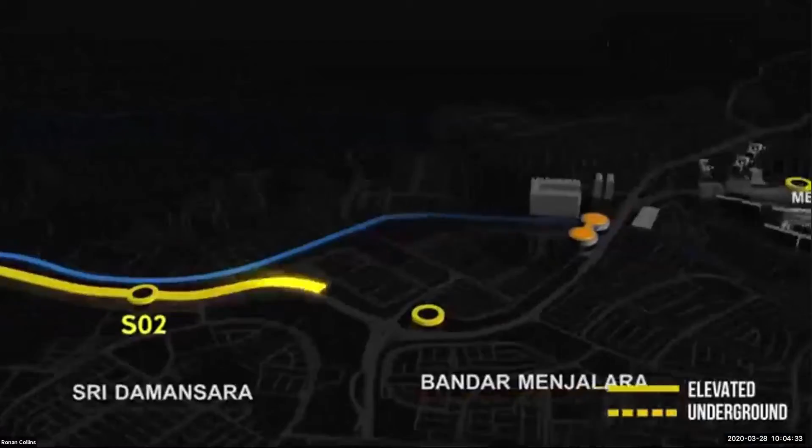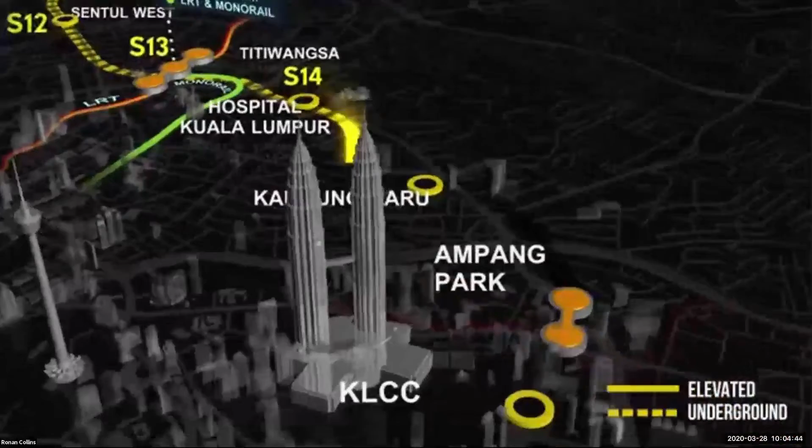So this is the actual alignment in a graphical form. So the section away from the city is all on elevated viaducts. So it's up on bridge sections. And when it comes into the city, there are twin bored tunnels coming through the city and they're coming to connect into existing LRTs and existing underground networks. So this train alignment is designed to connect to as many other train networks as possible to create a connectivity system.

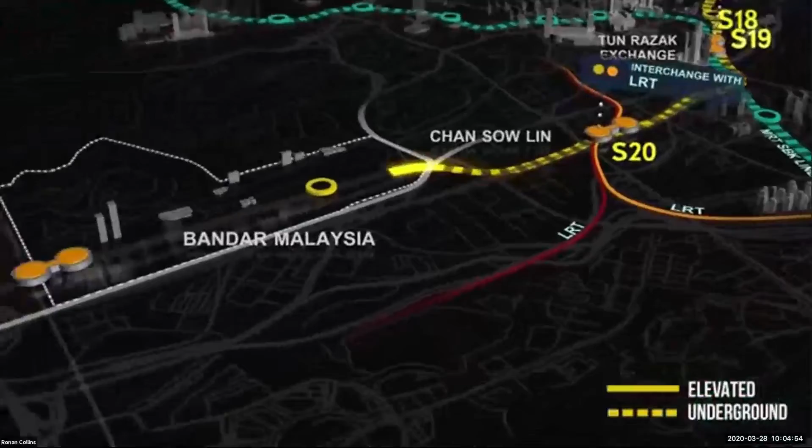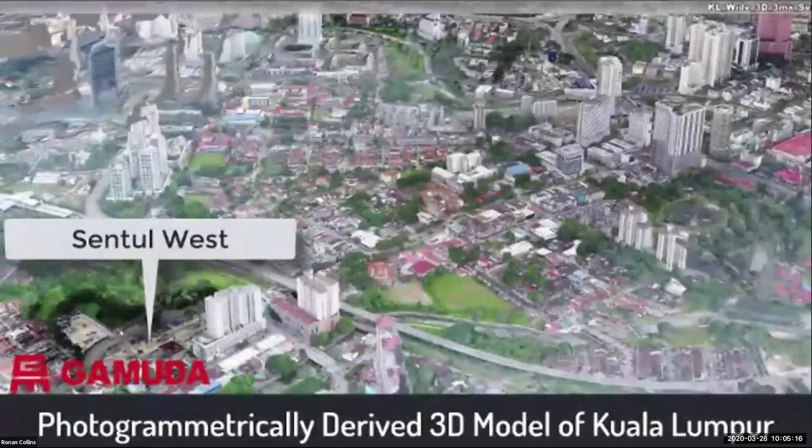And then once it gets to the south of the city, it then snakes all the way down towards an area called Putrajaya, which is the main government center, which is near the airport. So this is why it's such a long alignment. So it takes a long journey out of the city. Now, I'm going to show you the photogrammetric model. So this is actually a model that was generated in ContextCapture, which is a photogrammetry software. And it shows you the locations of the stations in a 3D city environment. So you've probably seen something like this before.

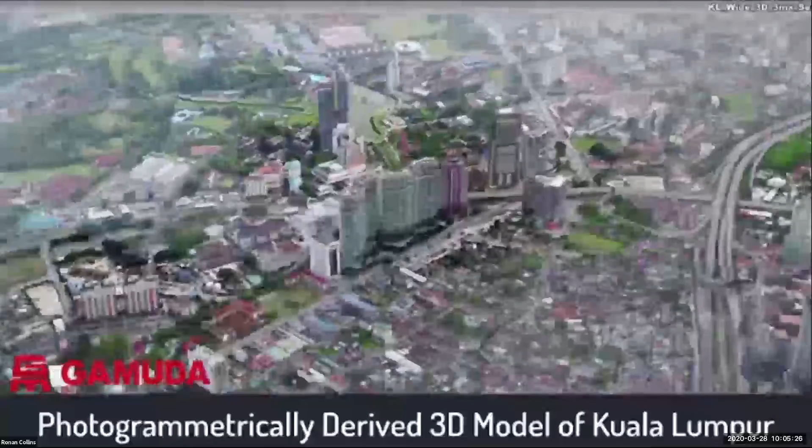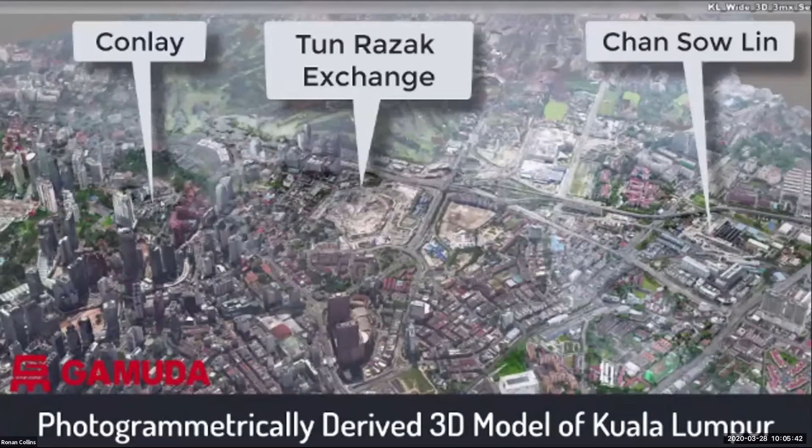So here you can see the Petronas Towers in the foreground, and you can see the locations of the stations in the city. So we've used a combination of helicopter imagery and drone imagery to create a 3D model of the entire KL city so we can actually locate the stations in the city. So you get a better sense from this imagery of the scale and density of KL and also the locations of stations. And here you can see the last two stations at Bandar Malaysia.

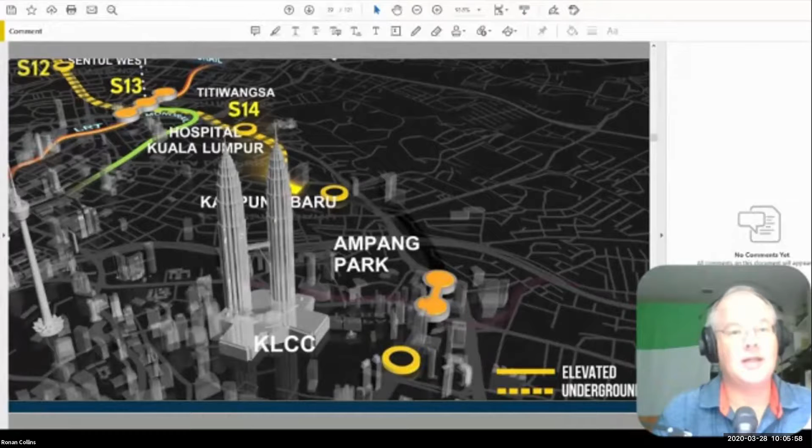So you can see it's a very large project. It's probably one of the biggest civil infrastructure projects in the region. And to give you a sense of scale, I call this an ultra mega project. Mega project doesn't seem to do it justice. There are 46 stations in total. There's 10 underground stations. There's 36 elevated stations. There's 38 kilometers of viaduct and 13 kilometers of tunnels.

So the elevated package has got 20 construction contracts. The underground is a single design and build construction project. And then there's a separate systems contract with 7 different contracts for things like security, escalators, platform screen doors, communications, etc. And then there are all these disciplines that have to be managed and coordinated across this project.

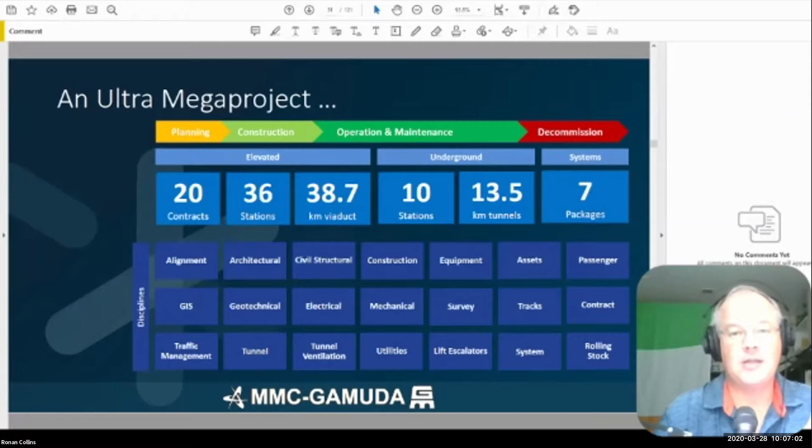Now, MMC Gamuda are the turnkey contractor for this entire development. So we are responsible for building the entire alignment. So it is an absolute massive undertaking. Now, for the underground section, the MRT specified BIM Level 2 for the underground. So all of the stations underground have been designed using BIM.

So here we are in terms of a project timeline, just to give you a sense of where we're at. So we started the project in 2015 and the detailed design was completed probably in the end of 2019. So a year ago, or a little less than a year ago. And we're now in the construction works phase and we're 70% complete on the construction works. So we've still got a third of the construction works to complete.

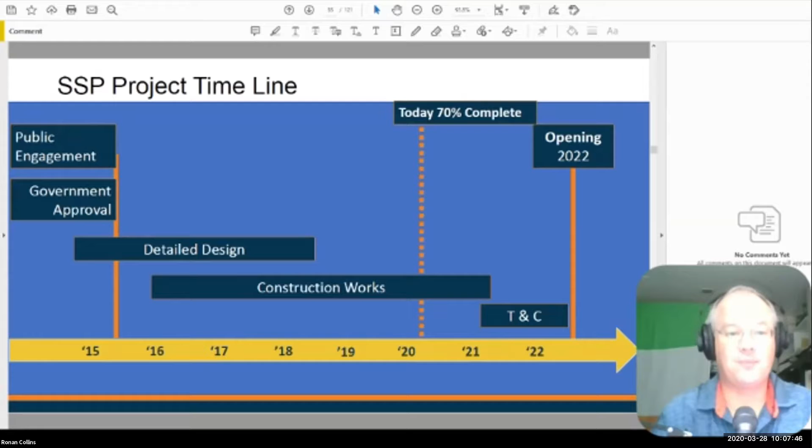And our expectation is to be opening line 2 at the end of 2022. And hopefully the current COVID-19 doesn't disrupt us for too much longer, but in a worst case scenario, it will be opening in 2023. So that's the timeline. So we're about 70% through with construction.

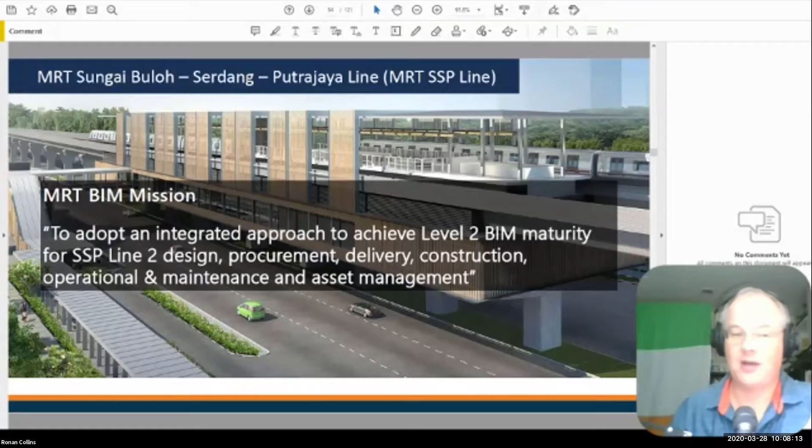So what did the MRT do in terms of BIM, in terms of specification? So they specified that for the project, we had to adopt an integrated approach. So to achieve BIM level 2 or level 2 BIM maturity for the SSP line 2 design, for procurement, for project delivery, for construction, and for operation, maintenance, and asset management. So this is the perfect case study for anybody who wants to understand the use of BIM for design, construction, and asset management.

So the first thing that you have to try and figure out when we were looking at this project in 2015 is, do we understand the scale and complexity of the project? And it's very, very hard for anybody to get their heads around the scale and complexity of this project. So you have to start working in teams to figure out, well, how complicated are the stations and how much work is one station going to be? And then you've got 10 of those, and then you've got to do the tunnels, and then you've got to do the viaducts, et cetera. So you've got to get some sense of the scale and complexity. Simply saying it's huge doesn't count for much.

Once you've figured out how big and how complicated it is, then you've got to figure out what the deliverables are. So you have to go through the contract requirements and figure out, what do I actually have to deliver? What information do I have to produce? What information do I have to hand over? What information do I need to build? What information do I need to manage? What information do I need to hand on?

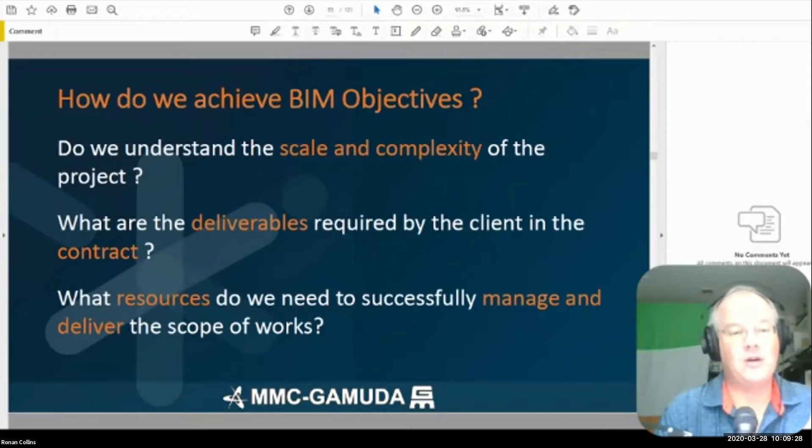Then you can start talking about the resources to manage and deliver the scope of works. So in our case, we went through this with the design teams, we went through this with the engineering teams, we went through this with the construction management teams, we went through this with the site management teams, the safety teams, and we worked out what we thought was going to be required to use BIM to manage and deliver the project.

Now, I use this slide because some of you might recognize the imagery. Does anybody recognize that project? West Kowloon. Yeah. So the roof of West Kowloon Terminus was the big, bright, red, shiny pimple that everybody was looking at. And it was sitting on top of this gigantic elephant of an underground train station. And BIM was attempted to be used by the MTR to solve and figure out some very complicated issues, and it failed. It failed because everybody was too busy doing 2D drawings and no one was looking at 3D problems.

And the MTR, God bless them, they all said, oh, I wish we'd used BIM earlier. I said, that's great, but now it's too late. Some people said, well, we used BIM, but the results were not what we expected. And then we said, well, okay, unless you guys specify BIM, it's not going to be done. And unless the deliverables are contractual, it's not going to be done. So unfortunately, we work in an environment where unless it's written in the contract, it's not going to happen by accident.

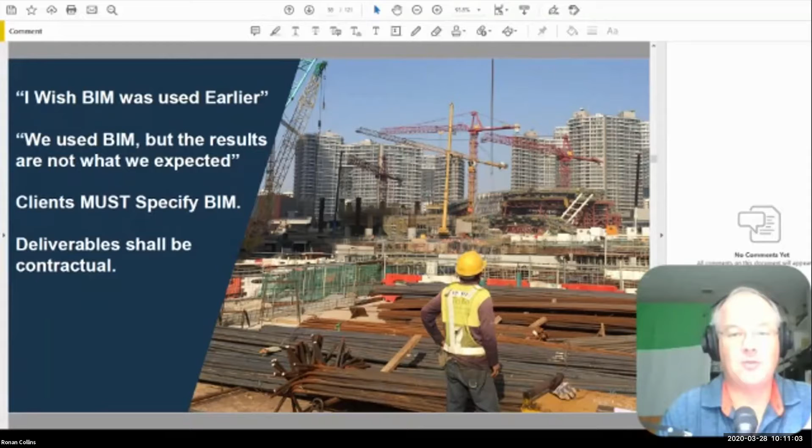So this contract was designed by AECOM and Aedas in 2 dimensions. And the only 3D design that was done was by Buro Happold and a little bit by Aedas to work out the geometry for the roof steelwork. And even then, it wasn't enough detail. And the contractors ended up doing a lot of work to figure out that roof. And they would have been better off spending the same money and effort working on the station design. But that's my opinion. So if you want BIM to be successful, it starts with the client. And in our case, in MMC Gamuda for this contract, it was the MRT.

So they planned out the implementation of BIM, they specified it, and they audited the use of BIM throughout the project. We still have regular meetings with the MRT to go through what's happening with BIM on the project. So you need to have client direction, you need to have client involvement, you need to have client leadership, working with the design consultants and the contractors collaboratively.

So some of you who responded to my survey earlier on mentioned BIM as a collaborative tool. That collaboration is between the client, the consultants, and the contractors. It's not between the contractors and subcontractors. It's not between the designers and the engineers. It's across the entire team, including the client for the project. If the client is not involved, if the client is not collaborating, if the client is not participating, you are not going to succeed.

And then every project must have a clearly defined outcome from the process. So this is commonly referred to as an employer's information requirements. What is required? Who is going to produce it? When is it going to get produced? And who is going to check it?

And then my favorite, the early contractor involvement is required to ensure projects are designed for offsite prefabrication. A lot of people want to do factory fabrication. They want to do all this kind of great stuff, but they don't want to get a contractor on board till they've done all that and they get a hard tender price.

It doesn't work. So if you want true collaboration, you have to tear up the rule book when it comes to tendering and forget about low price tendering. You need to get the best contractor with the best experience and you need to get them involved as early as possible. So early contractor involvement is required if you want to have any success.

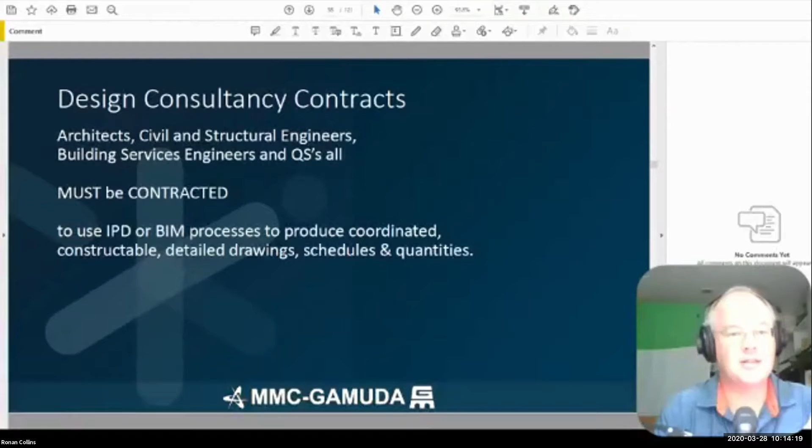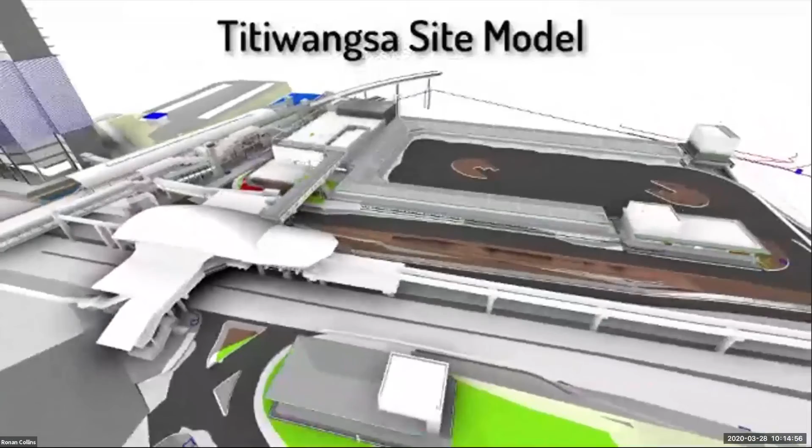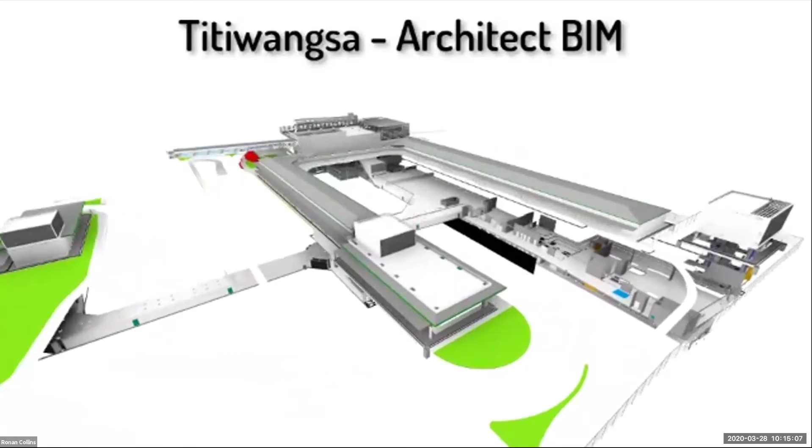So here you can see the overall federated model, which is everything combined. And then what we're going to do is go through it section by section. So this is the architectural model. Now, a key issue here is we've only got architectural elements in the architectural model. There's no structural elements in the architect's model. It's a very important issue. The structural elements are all in the structural model.

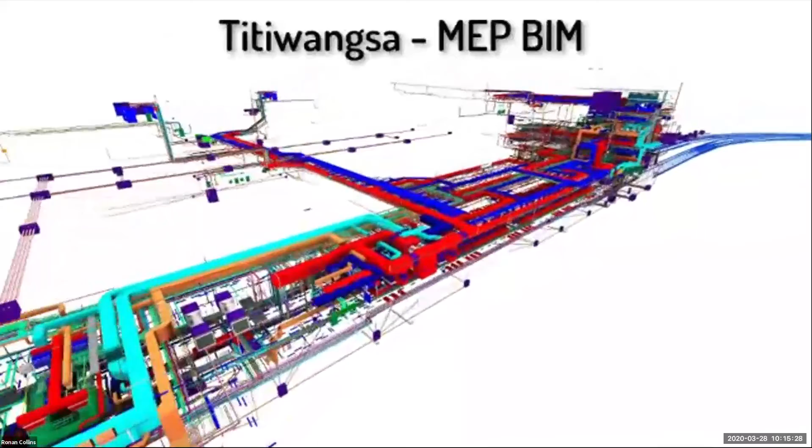So here you can see all of the concrete components, D-walls, slabs, beams, piles, and it includes all the external drainage, because that's part of the civils works. Then you get into the complicated systems for the MEP. So here you've got the air conditioning systems, electrical systems, plumbing and drainage systems, and fire sprinklers. These are all detailed and designed by AECOM.

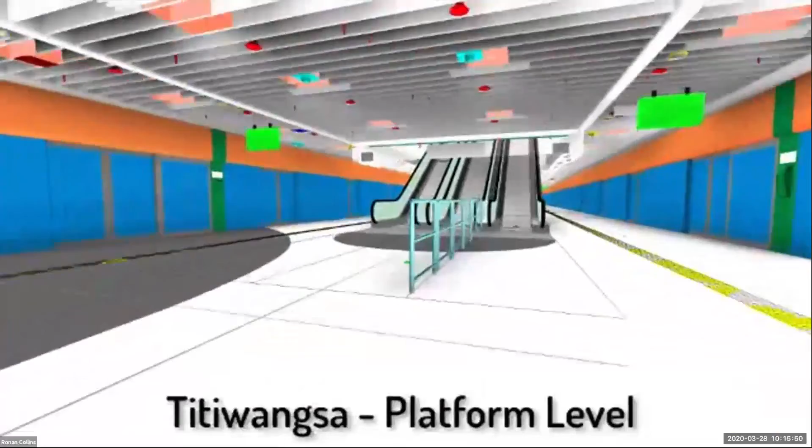And then you've got the railway operation systems. These are the 7 different packages by the other contractors. So there's train systems, platform screen door systems, communication systems. Our job as the main contractor is to actually facilitate the coordination of all these different systems.

So this is a federated model walking through, and you can see all of the different systems have been put together in this model. So you can see the tactile paths, you can see the signage, you can see the glass smoke screens, and this is actually a section through the station. So you can see the level of detail and level of coordination.

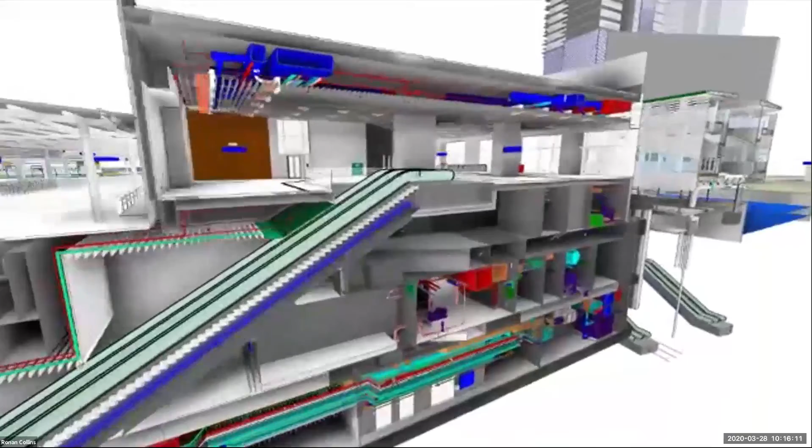This piece of software is called Navisworks. So Navisworks is a tool that we use to federate all the different systems together. And then we use this tool to navigate around and look for issues in the models. So this is one of the 10 stations.

So here's Elle's comment. We had problems knowing whether they actually know about BIM. Once we hired them, we found out, apart from the QS and BIM consultant, none of them knew how to use BIM. So they just sublet the BIM back to our BIM consultants. Is there a way to identify whether they actually know BIM or are just saying it to get the job?

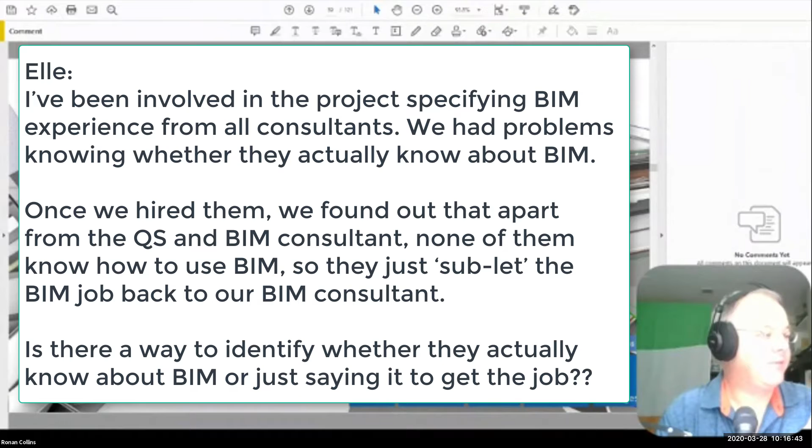Brilliant question. So if you look at the latest international standards, there are requirements for how you procure services and how you check the competencies of consultants. And there are questionnaires which can get into whether or not they can do it. But in my experience, the only way that you can get the consultants to perform is you have to take a very simple stance. You have to take the stance that they are going to bullshit you in the procurement process and say, oh yeah, no problem, we can do that, we did that before.

So every consultant wants to win the work, and they all need the work because they're basically in a cash turnover business. None of them are making any money. They all need contracts to stay alive. So they're all going to say yes. So if you're a client, you have to work on the principle that these guys are going to say yes, but then you have to hold them contractually.

And what we've discovered is you have to put it in their contract that all of their drawings have to be produced from models, and that they have to demonstrate that the drawings have been produced from models. And here's the trick. You have to provide them with a common data environment where they have to upload their models and their drawings. And it's very simple to check if they've done it correctly. So if I open a Revit model, I can very quickly determine if they've done the drawings in Revit or if they've got somebody else doing it.

And by making it contractually mandatory for architects and engineers to model first and draw second, you will eliminate BIM consultants, because most BIM consultants are doing what I call a backwards BIM process by going from 2D documents into 3D models. And that doesn't work, because as soon as the consultants change 2D drawings, the models are useless. So the answer to your question is none of them have got the right experience. They're not going to get the experience if they keep giving it to BIM consultants who don't know how to do design. So you have to write in the contract that they have to do modeling and they have to generate the drawings from the models. And then you have to find some way of policing it.

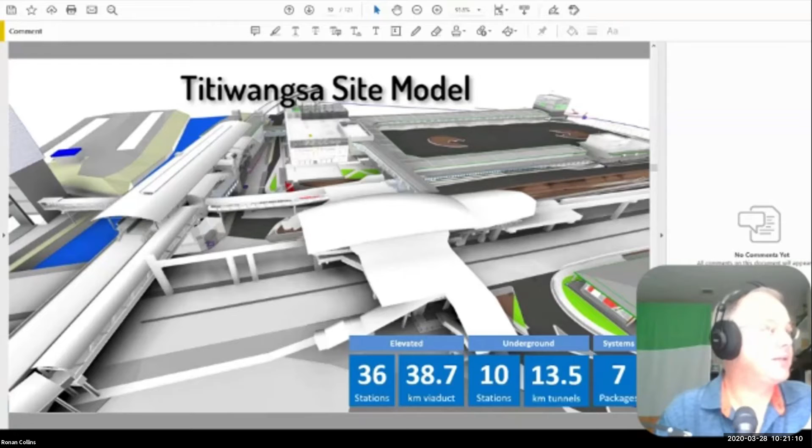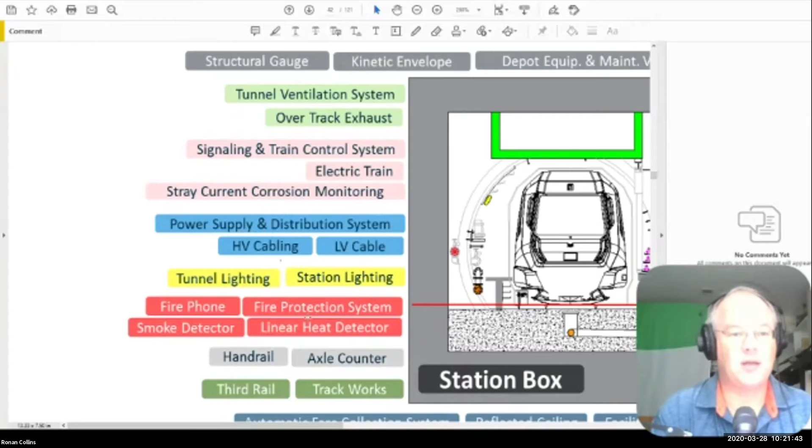So here's another example of the complexity. One of the challenges with any project, but particularly with major infrastructure projects, is the number of interfaces. Down one side, you've got all the operating systems for the trains, so things like ventilation systems, power supply systems, then you've got safety systems. And then along the bottom, you can see you've got all of these other systems, right?

And then you've got architectural systems like ceilings, you've got SCADA, then you've got drainage systems. And when you go back up the other side, you've got environmental control. And on top of all that, you've got things like the structure, you've got the other systems. So all of these interfaces have to be figured out. The challenge is, each of these systems is designed by typically different engineers, different firms.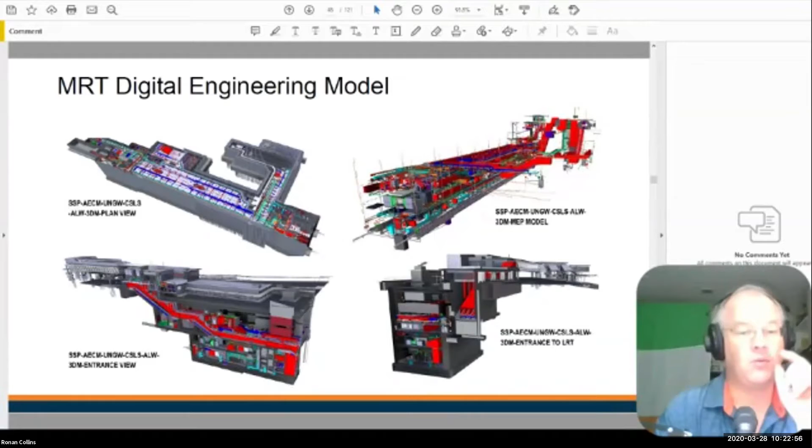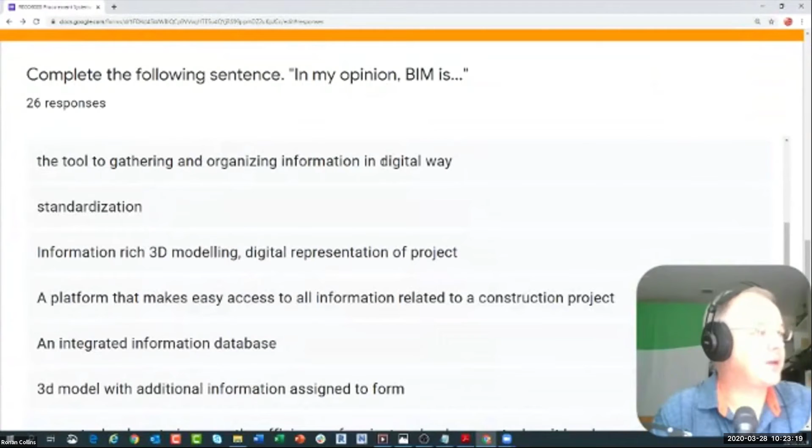So if we go back, these are your responses to the questions earlier on, and it's in here all the time, right? Collaborative medium, right? A tool to gather and organize information, right? And a platform that makes it easy, right? So you guys comprehend what's required. So let me show you the common data environment that we used. The first thing is we call this a single source of truth.

So the common data environment is effectively Windows Explorer on the cloud with a layer of security. That's all it is. It's nothing more complicated than that. It's nothing more sophisticated than that. It is essentially folders of drawings, folders of models on the cloud that everybody's got secure access to. And it's the only place that they can get access to the models, okay? So the issue with these platforms is behavior.

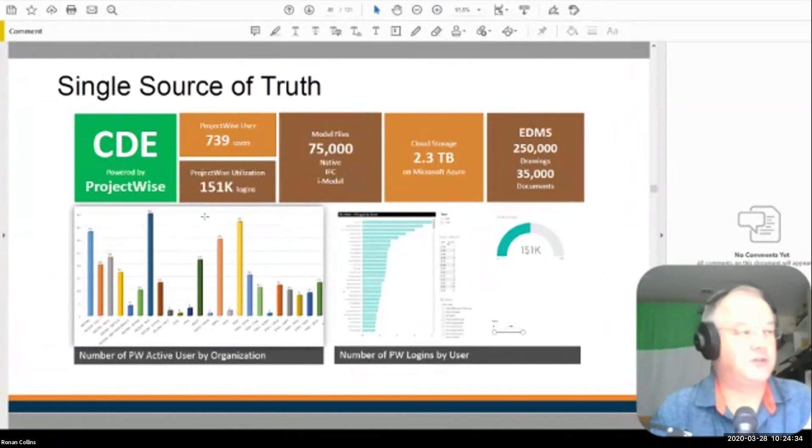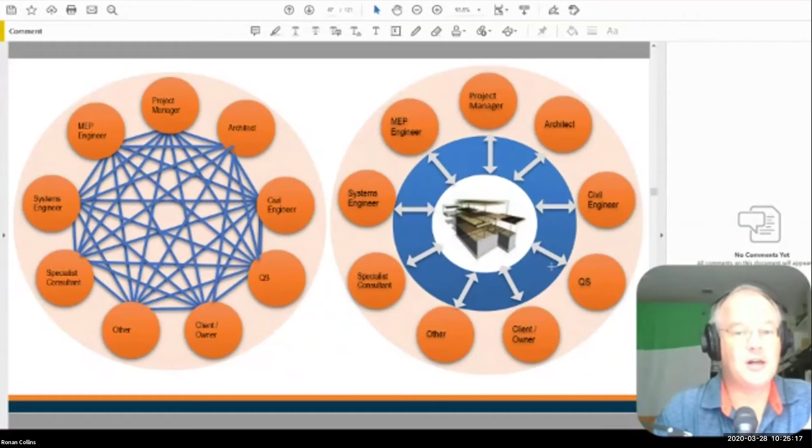So if you're the QS and you want the latest architectural drawings, you don't call up the architect and go over to their office for a coffee. You go onto the central system and you take the information from the central system. So we're trying to cut out all of the one-to-one interactions and make them one-to-central. So this is basically a simple graphic which explains how this works.

Now for our project, we have design consultants in Singapore. We have design consultants in Hong Kong. We've got design consultants in the Philippines. We've got some in Taipei. And we've got offices in India doing MEP modeling and MEP coordination.

And all of these companies and all these locations need access to the information. So this needs to be a global platform. So what it does is it creates a single source of truth. We use common formats. So we use Revit, we use Navisworks, we use IFC, and we share the data frequently.

So we have a rule that every week the architects, the engineers have to upload models. We don't care if they're finished, if they're half finished, if they're nearly finished, if, oh, I just need a few more hours. Every week there's a deadline and we want to see them sharing the information.

And what we're getting at is that the early communication, it's easier to fix problems the earlier we see them. So we want to see progress, we want to see the models, but we want to keep an eye on the design progress. So the key issue here is that you start to collaborate in the true sense of the word.

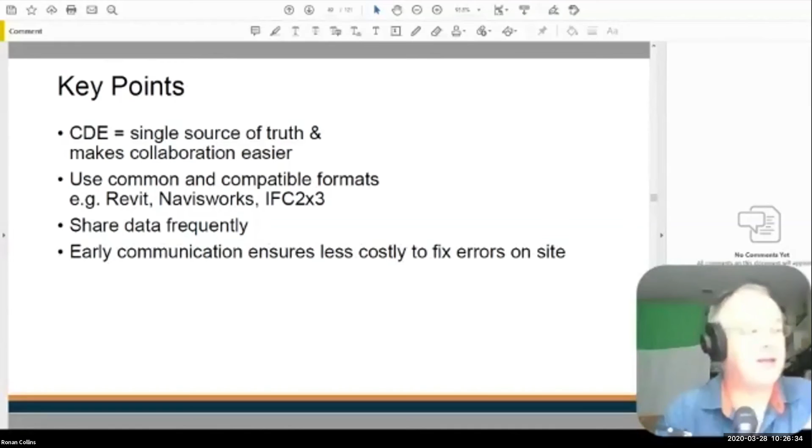So the information that's being shared for this project: all the models, all the visualizations, all the review reports, all the coordination issues, all the drawings, all the schedules, all the links to GIS, I'll explain that in a couple of minutes, and all the data for facility management. And you're basically going, well, that's everything. I'm like, yep, that's everything. So all of the information required for the project is supposed to be stored on the CDE.

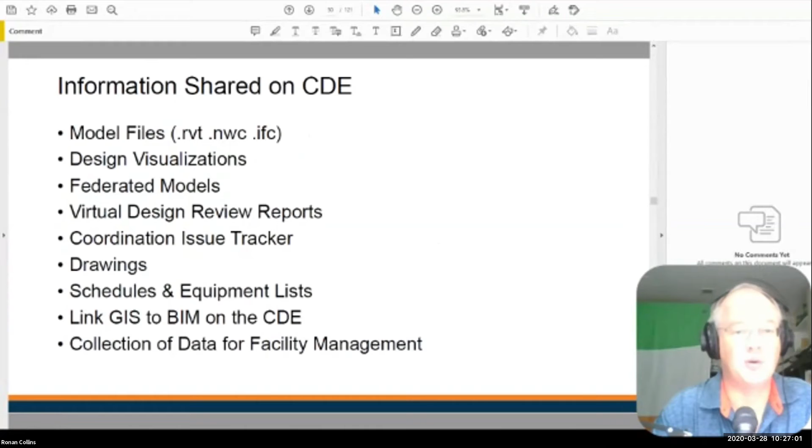So what we've done is we've set up a couple of basic principles. The first one is that this is a single source of files, right? So anybody who's working the project, if they turn around and say, oh, I don't have the latest architectural model, we're going to point them to the CDE. Oh, I haven't seen the latest structural drawings, we're going to point them to the CDE. Oh, I can't remember what they discussed at the last workshop, we're going to point them to the CDE. So everybody has to start working through this collaboration environment.

So we've killed Dropbox, we've killed WeTransfer, we've killed OneDrive. All those single collaboration systems have all been eliminated or outlawed on the project. We're only using common compatible formats, Revit, IFC, PDF. So you have to put up those formats. It's frequent and it makes early communication essential.

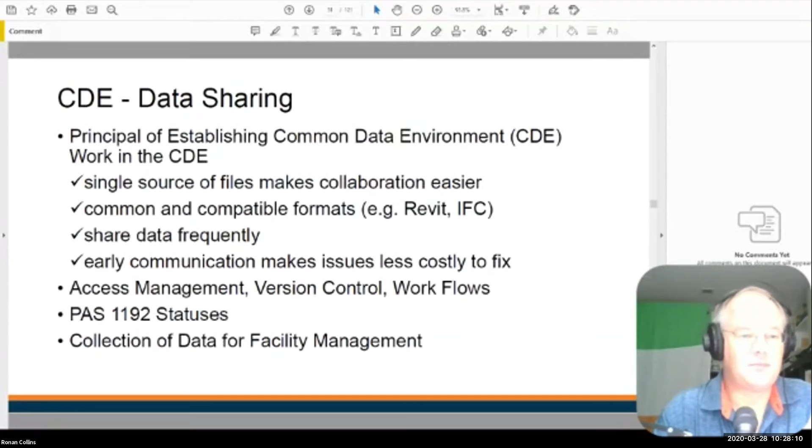And then we have a layer of access management. So only certain users have access to certain information. We have a layer of version control. So every revision of every model is controlled. And sometimes we use workflows. And then we use this condition of statuses, which I'm going to explain to you in a minute in terms of PAS 1192. And eventually we get to collecting data for facility management.

And once you share something, you're basically saying that that's reliable design information, that it can be used for coordination, it can be used for commenting, and it can be used for ongoing design development by others, and it includes any major versions or any major revisions. So when you share information on the common data environment, you know it's going to get used by other people for their purposes, okay? So this is really important that you share stuff that other people can use.

Once the sharing has been done and everybody gets happy that they can move on, then they go to the documentation phase, okay? So this is what we call published information. So this information has been coordinated and is validated for the use for tender, for contractors, for manufacturing, for construction. So in other words, this is issued for a purpose.

So once the sharing has been signed off, it could be for tender. It could be to the QS for costing. It could be to the contractor for building. But you move the information from a shared state to a published document stage. And then once that has been built and has been audited and has been signed off, then you archive that information. And the archive is a record of all the information that was collected on the project. So you only have 4 different conditions for the information.

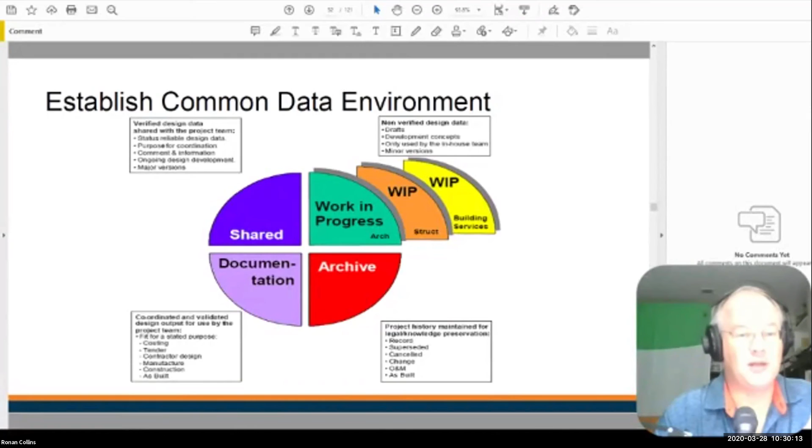And then I've got the discipline for architecture. And then under the architecture discipline, I've got a 2D drawing folder, I've got a 3D model folder, and I've got a PDF folder. So the 2D drawings are CAD, 3D models are IFC models, Revit models, and then I've got PDF renditions. And it doesn't matter if I open up any other consultant's folder, they will look exactly the same. So every discipline folder is the same on every station, on every part of the underground. So even though I've got 35,000 drawings, if I'm looking for a drawing on a station for a discipline, I know exactly where to go looking for that information.

So everybody has the same folder structure. And it's been clearly laid out as to how they're supposed to use it. So there's an explanation of how you're supposed to use it. And then we train people how to go through these different statuses, and we explain it step by step. So for example, for the MRT station, if I have a building services model, say an air conditioning model, I will link to or reference the structural model from the shared information on the system. If I need the architectural model, I'll get that from the system.

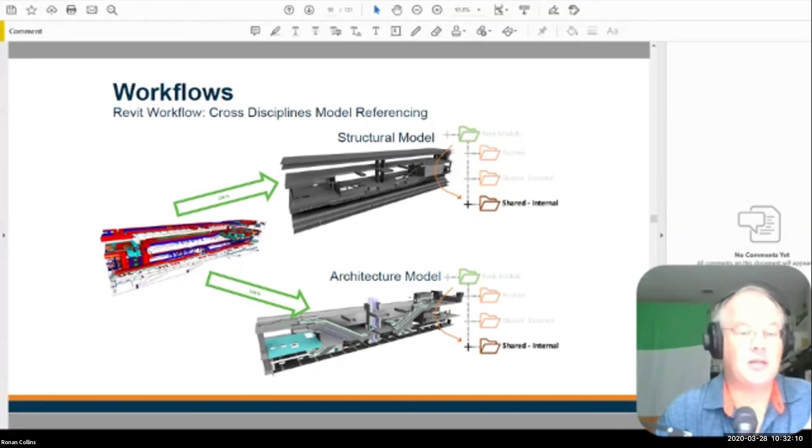So if I'm the mechanical engineer, I will go to the system and I will get the structural model and the architectural model, and I will get their shared models, and I'll use that for my coordination. So if I'm a mechanical engineer, worst case scenario, the architect's model is no more than a week old, and the same for the structural model. So I know I've got the latest coordination information available. Once I've gone through and checked that, I can then share my model for other people to use it.

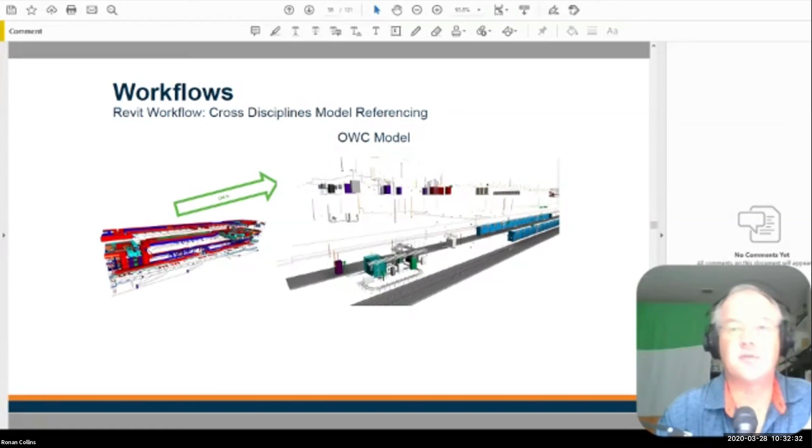And here you can see an example. This is the OWC, the Other Works contractor. So this is the guys doing the systems. In this case, it's the electrical systems for the train. Just examples, so you can see the transformers and the cable trays. So this is the model by the OWC. So I can use that for my coordination. And once I've done my work, I can then publish it. So that's what we're going through: my work, what I can get from the structural engineers, mechanical engineers, what I can get from external contractors, and then I can get to publication.

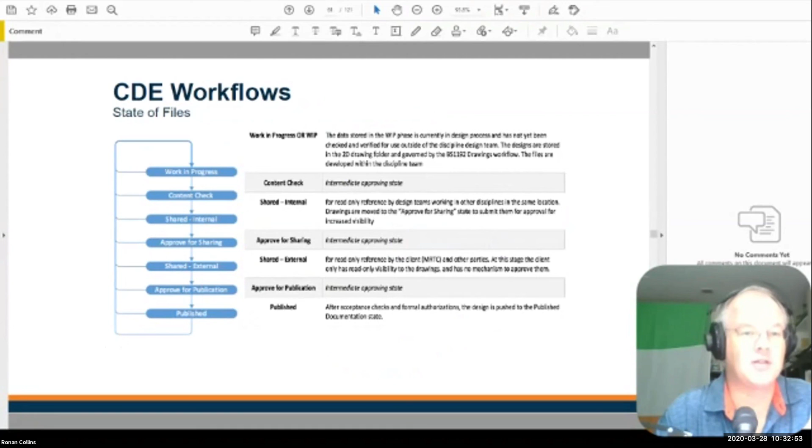So again, because of the work we've done with the CDE, because of the work we've done with the models, and because of the work Nick's done with his team, we've received international recognition for the work. So again, this is not to brag. This is a way of us showing you how we motivate our staff and how we make sure that we breed success in the organization.